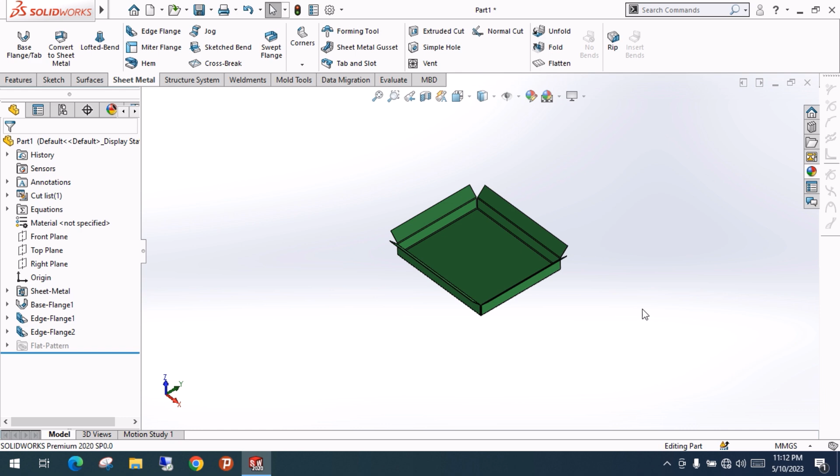So today we will see another feature of sheet metal that is called Miter Flange. If you remember, we covered edge flange last time. So what is in edge flange? In edge flange, we can create a single flange at one time. So what we did actually, we created just this edge flange at once, then again this edge flange at once.

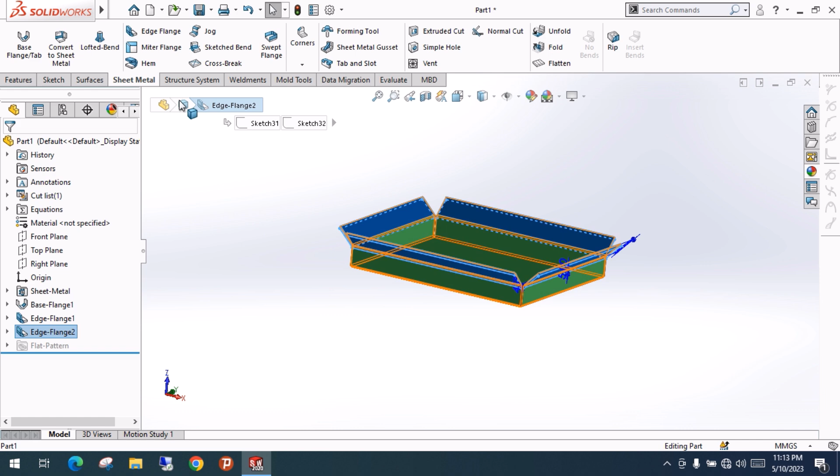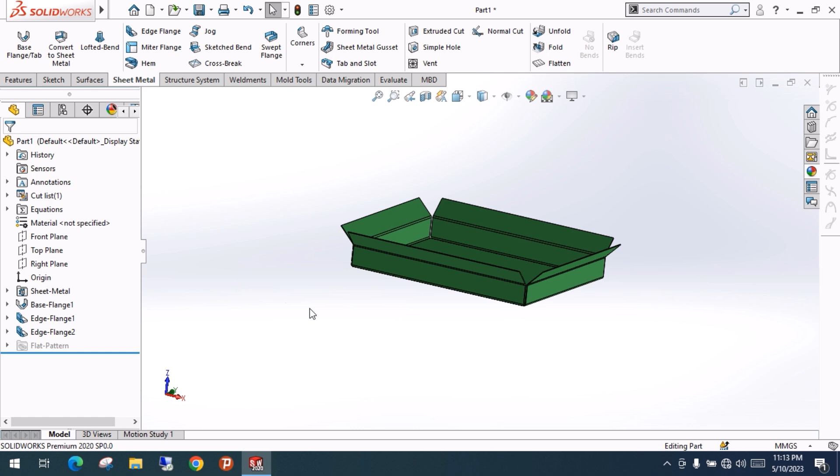So there is a good thing about the miter flange: you can create multiple sketches at a single time. You can create multiple edge flanges in a single go. So better we can see here. So I'm just going to delete a few. We can create a new part as well. So just going to new part.

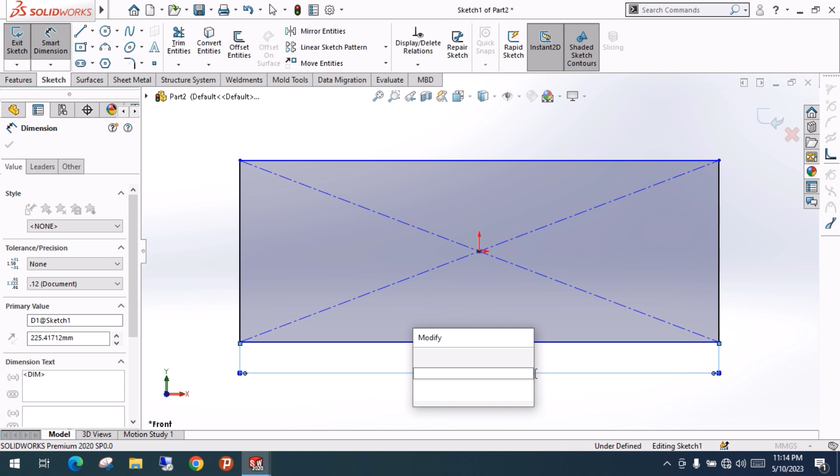What we will do: we will first take the front plane and just make one sheet here, 300 and 250 you can take. So I'm going to sheet metal and this time I'm creating 2 mm, you can take any value. So this is our base metal plate.

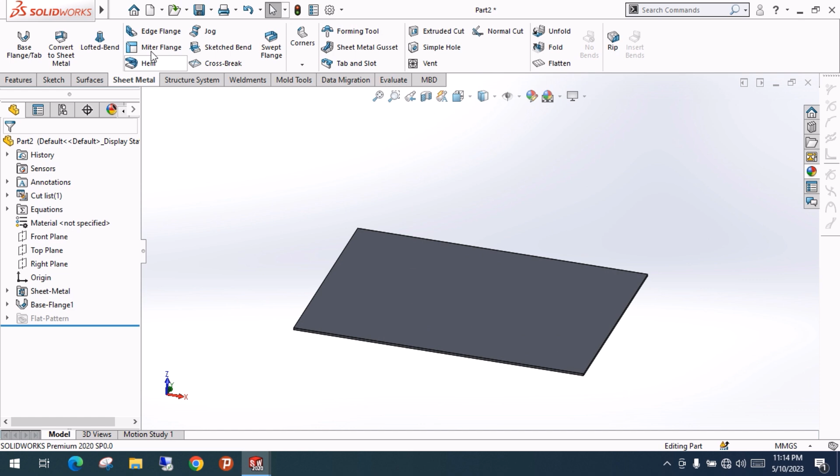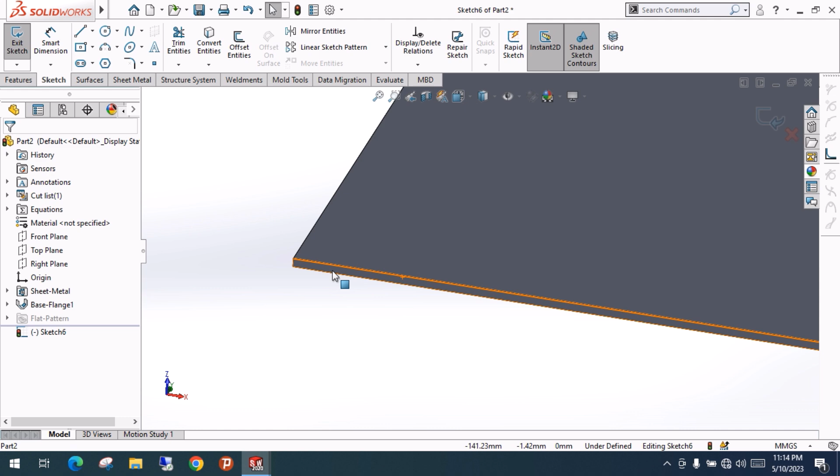So for miter flange, if you go on miter flange, it will ask you to select a plane or planar face on an edge to which a sketch is to be featured. So we have to select an edge, basically a face. So I'm selecting this face. So I'm going to normal and I'm creating a profile, whatever kind of edge flange you require.

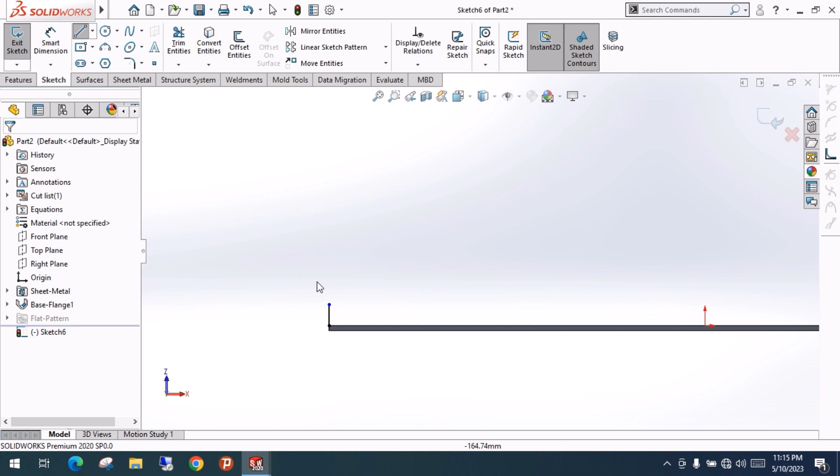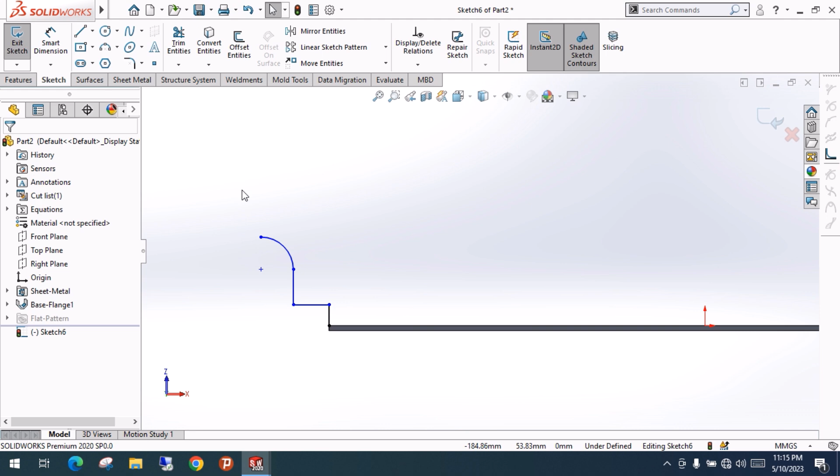So this time I want to make an edge flange first going upward, then select line and going outside, then going upward again, and then a kind of quarter circle. Okay, so I just want this kind of edge line. If you individually use edge flange, you have to first perform this one, then this one, then this one, then this. So this is the good thing about the miter flange. You can directly sketch multiple edge flanges in a single time.

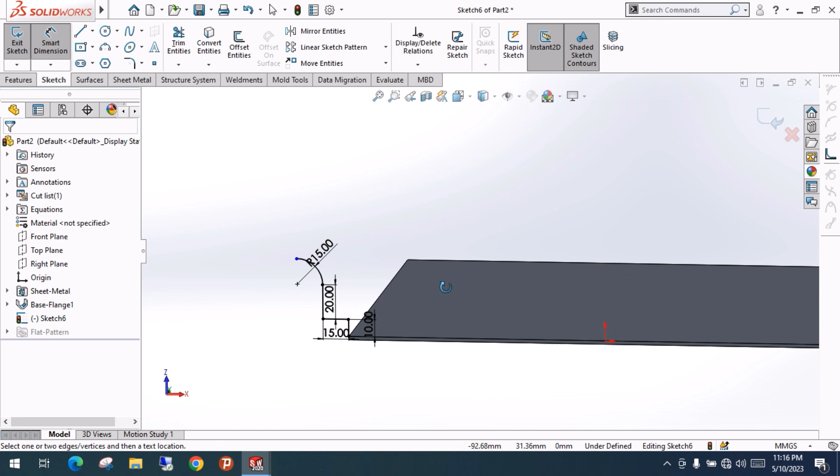So just give the dimension 10 mm, 15 mm, and this time I'm taking this 20 and take a radius of around 15. So I've just given the dimensions randomly. So this is our sketch. Then go to sheet metal and click on Miter Flange. So by default it is creating. So let's clear this thing.

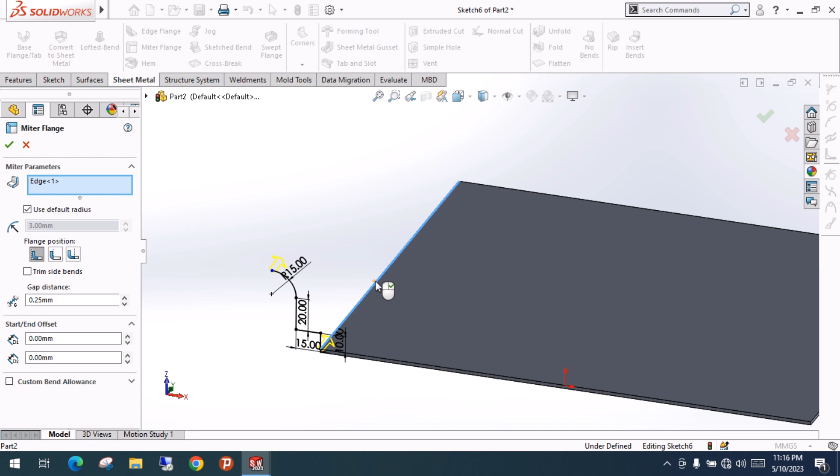So the first thing it is asking is which axis you are going to perform this on. By default you have to select the axis which is perpendicular to this cross sketch. So we select this axis first. So this is creating our miter flange. You can see here there is some radius. You can control that radius from here. By default it is taking 3 mm. You can uncheck this, check this and give some radius here. So I'm giving 1 mm.

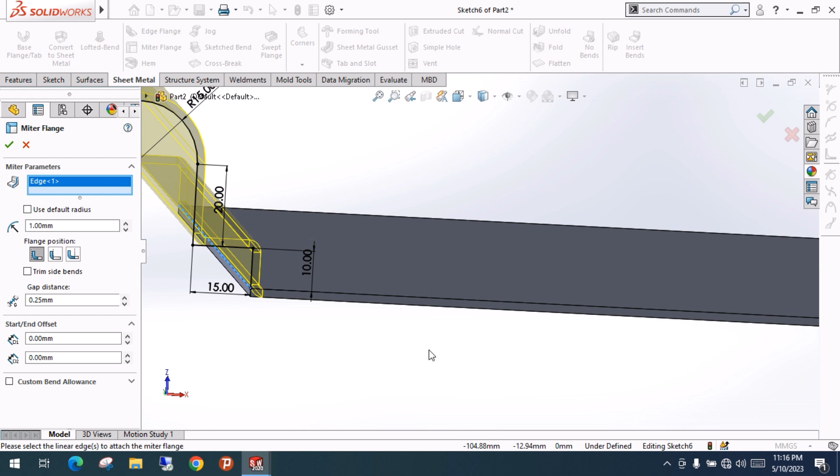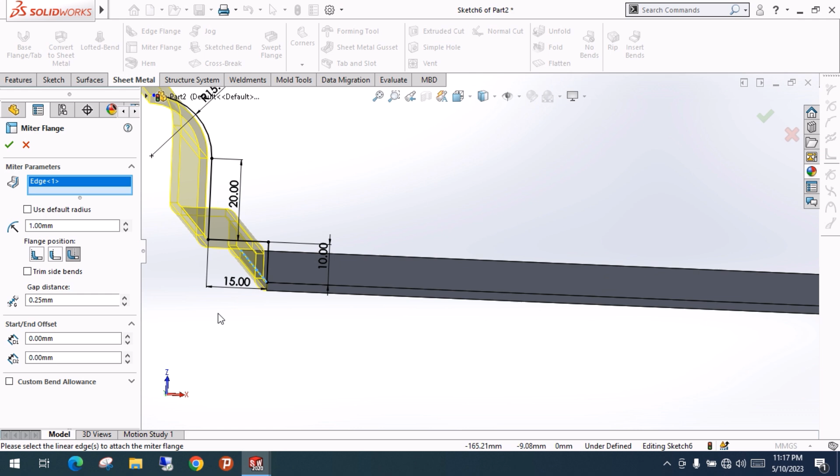And as we have seen in the edge flange, there are multiple options available for the flange position. So here it is starting from the outer face. If you see here, it is starting from the inner face, and if you see here, it is completely started from this outer face. So you can control accordingly.

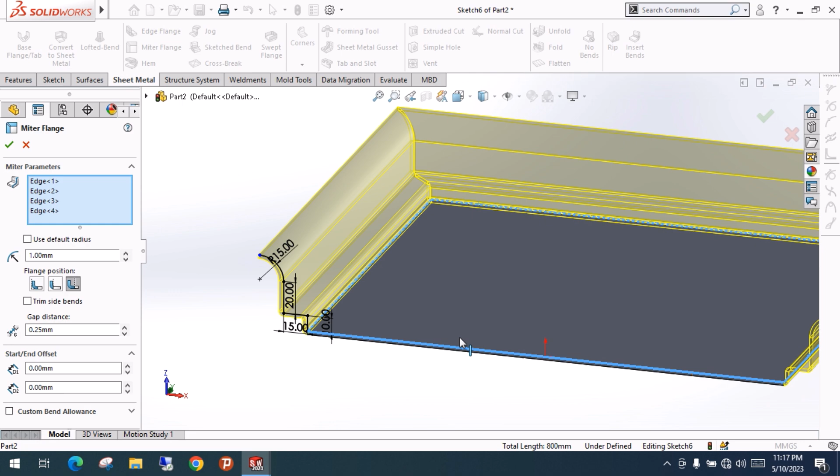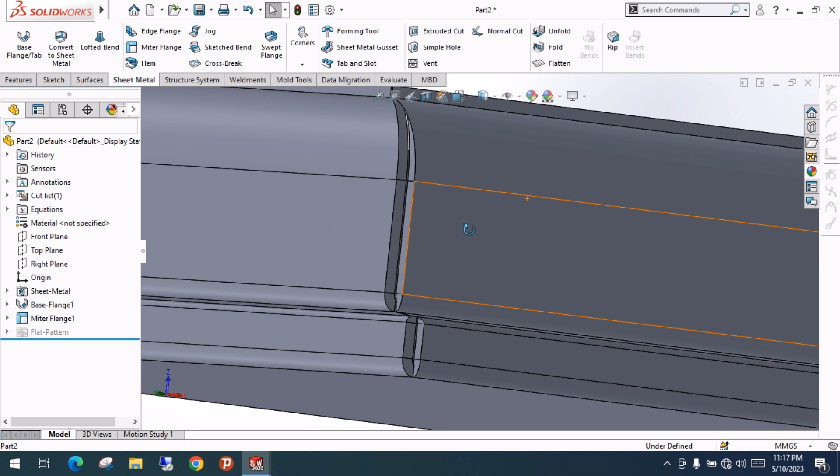So what is the gap distance here? Gap distance we will see if you apply, suppose, this on one side; you can select multiple edges here also. I'm just going to select all 4 edges. First we have to click OK, then I can show you. Okay, if you see here at the junctions, at the corners, there is some kind of gap available. So that gap is controlled through that option. Earlier we have also seen this on the edge flange.

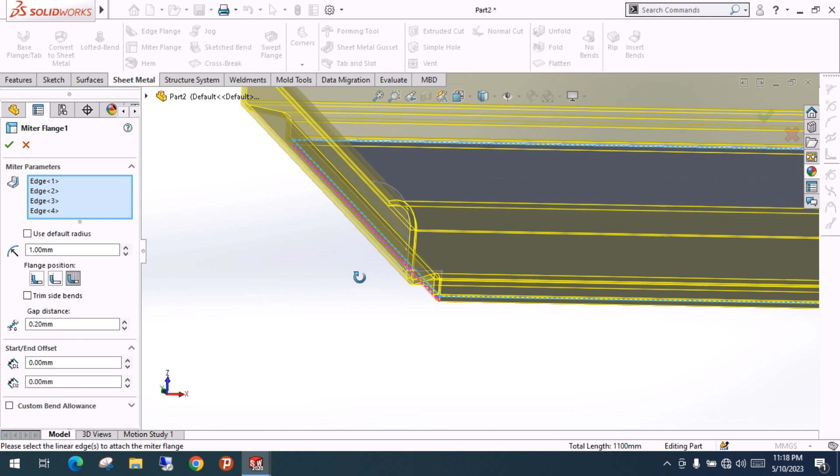So you can control this gap here, like 0.2 mm. That gap you can measure from here. If you clear all things, just click one line. What is this start and end offset? So by default, this sketch is performing the miter flange on the whole edge because we are selecting the whole edge. We are not giving any kind of offset or sketch trimming.

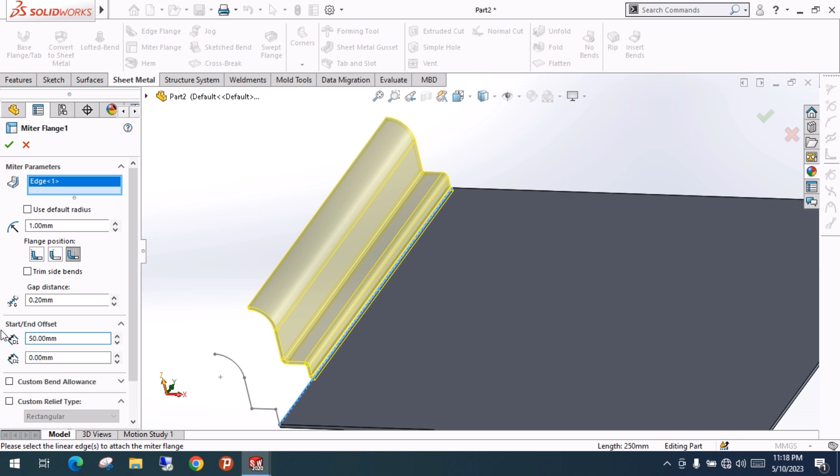So that offset you can control from here. This distance is controlled from the 2 points of this line. If you give some distance here, like 10 mm, our miter flange will start from 10 mm distance. Suppose we give 50, and from the end you have given 50. So it is starting at 50 distance from both sides.

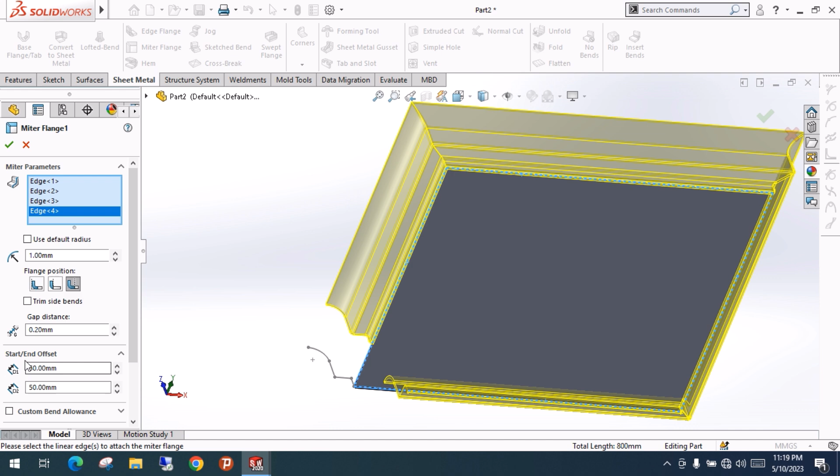So what happens when you select multiple connected edges? Whatever edges you have selected over the whole region here, this is the starting point. From the starting point, this is where our miter flange starts. So from the starting point it is offsetting 50 mm, and after the contour ended, the contour is ending here for this whole, so this side is also 50 mm. So this is how it works.

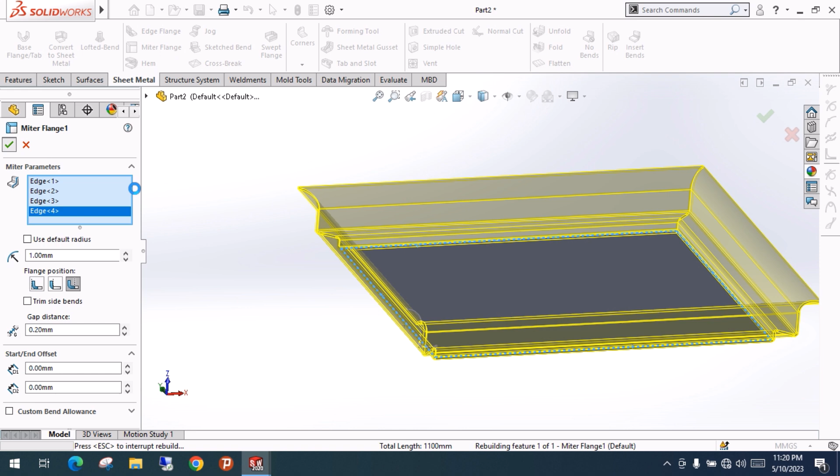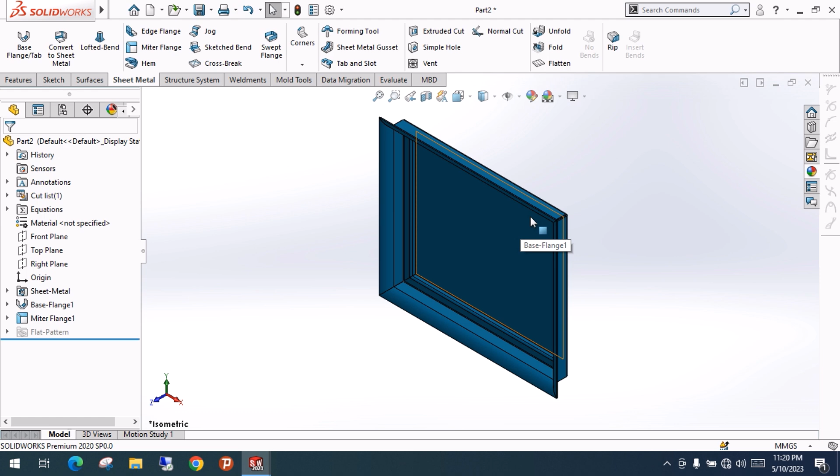If you give 0 here, what will happen? It will end from this point. And if you give 0 here also, it will give you the complete profile. So this is how our miter flange works. You can create any kind of geometry like this and perform multiple edge flanges at a single time. You can give any kind of color here. Okay. So this is how the miter flange works.